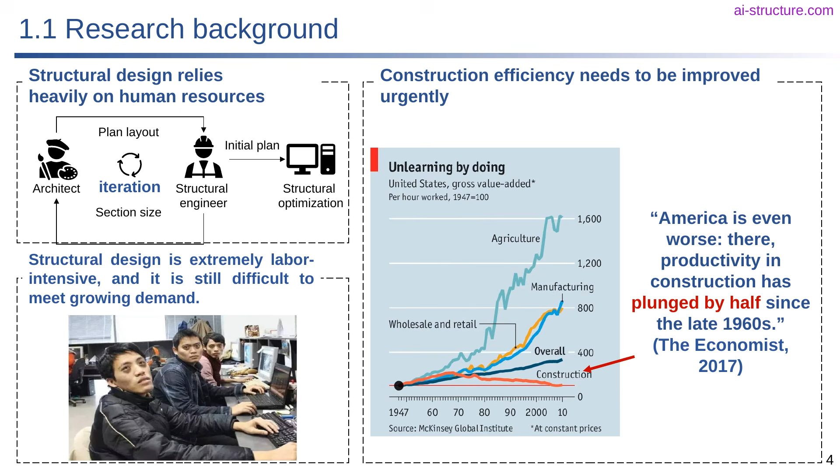When I saw this type of demonstration in 2017, I thought it would lead to a revolution in our industry. The reason is simple. For engineers, one of the most important outputs of our work is the design drawing. From the perspective of a computer, there is no fundamental difference between a human face represented as an image and an engineering drawing represented as an image. If AI can learn from many faces and generate a new face that looks realistic, then, after learning from many engineering drawings, it should also be able to generate a new design drawing that resembles one produced by an experienced engineer. That was the fundamental idea that led us to begin this line of research.

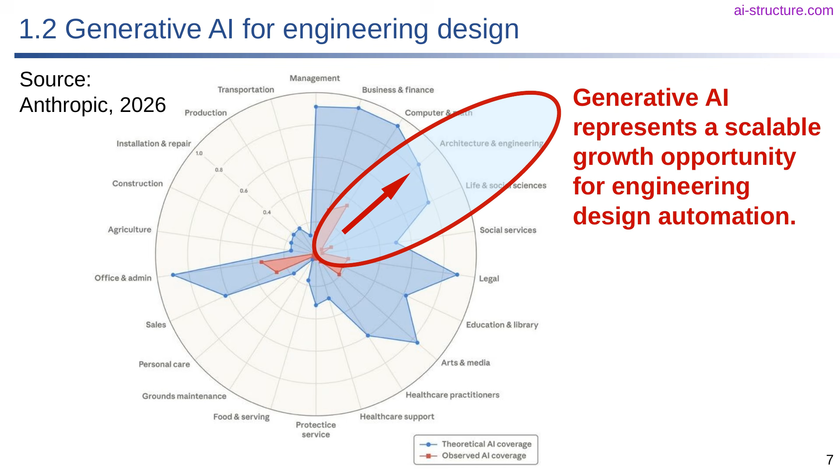9 years later, it is encouraging to see a similar conclusion in a report released by Anthropic, one of the best-known AI companies in the world. The figure on this slide compares the current use of AI in different activities with its potential future use. The red curve represents current application, and the blue curve represents future potential. Architectural and engineering design show a particularly large opportunity for further AI-enabled automation. Our conclusion, reached from the perspective of civil engineering, is therefore consistent with the broader assessment of the AI industry.

Looking back at our work, I think it can be summarized along 2 complementary directions. The first is to push the ceiling of AI algorithms. In Chinese we call this ding tian, reaching upward. As university researchers, we are especially interested in the scientific questions: how to improve representation, learning, optimization, physical consistency, and reasoning. The second is to ground the technology in diverse engineering applications. In Chinese we call this li di, standing firmly on the ground. We do not want the algorithm to work for only one narrow problem. If a task involves the generation of engineering drawings or design objects, we want to test whether the method can be extended across disciplines.

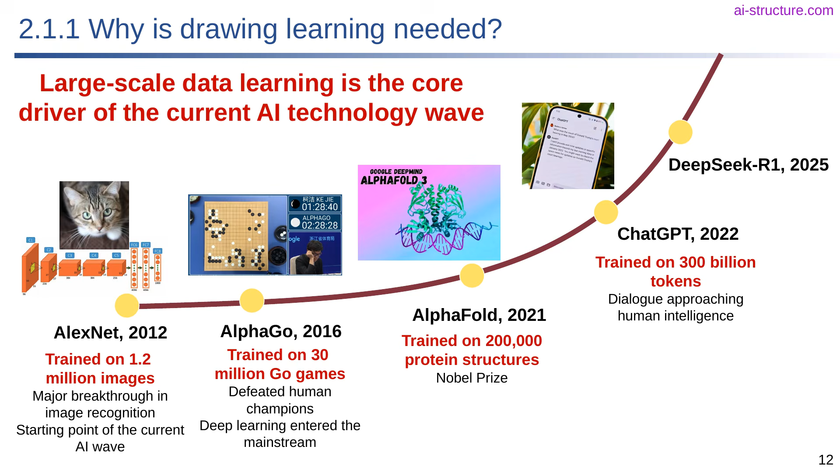If we want to use AI for engineering design, we must also make full use of this data learning capability. This is particularly important in engineering because a great deal of engineering knowledge is implicit rather than explicitly written down.

I like the well-known observation attributed to Dr. R. Dykes: engineering is the art of modeling materials we do not wholly understand, into shapes we cannot precisely analyze, so as to withstand forces we cannot properly assess, in such a way that the public has no reason to suspect the extent of our ignorance.

The quotation is humorous, but it makes an important point. A student may complete courses in structural mechanics, reinforced concrete structures, and design codes, but that student cannot immediately become a chief engineer. Several additional years in a design institute are normally required.

During that period, the young engineer learns from drawings, experienced colleagues, and project feedback, in ways that often cannot be reduced to simple rules. If human engineers must learn this way, AI must also learn from engineering drawings.

We therefore began by constructing a very large structural design dataset. More importantly, we established a data flywheel.

We made our model available online so that engineers could use it. When users encountered a special case that the model could not solve well, they reported the problem to us. We then expanded the dataset, retrained or improved the model, and returned a stronger model to the users. Through this cycle of use, feedback, accumulation, and optimization, the database and the model became progressively more capable.

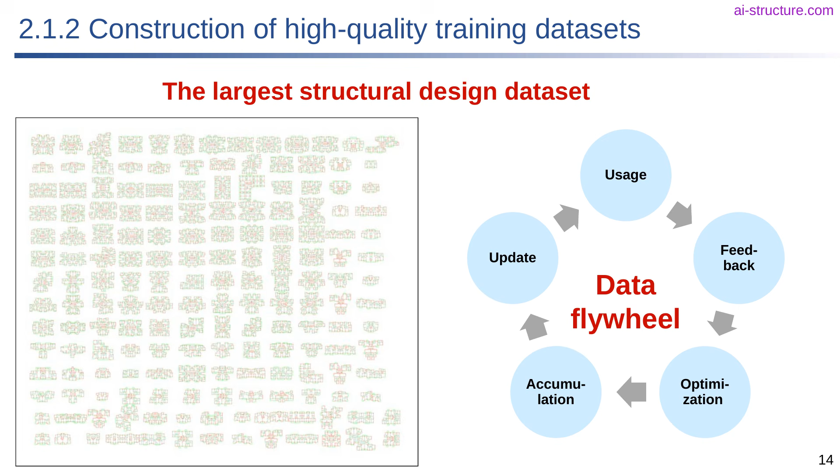Using these data, we divided structural design into several levels: vertical component layouts, horizontal component layouts, cross-sectional design, and special component design, including isolation and foundation-related tasks. This divide and conquer strategy allows us to define an appropriate representation and model for each task while gradually building a complete structural design chain.

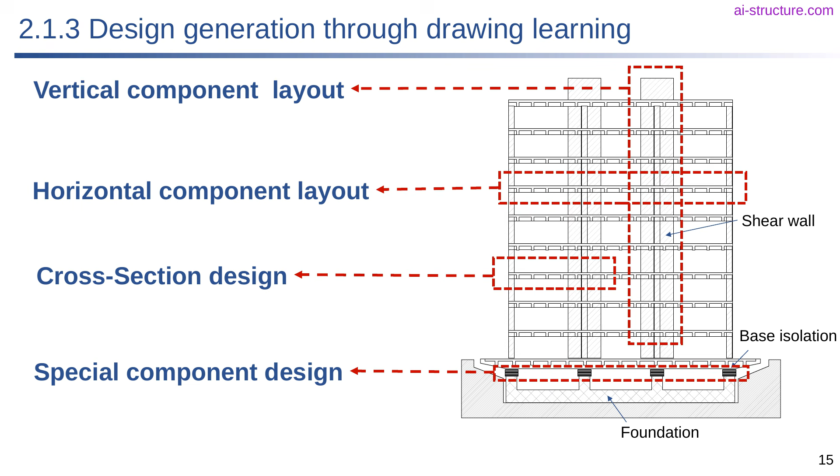There are two principal image-based generative methods available to us: generative adversarial networks, or GANs, and diffusion models. A GAN learns through competition between a generator and a discriminator. A diffusion model learns the inverse of a noise-adding process and produces a design through iterative denoising. Both can learn from existing drawings and generate a new design, but diffusion models have generally given us better global stability and local detail.

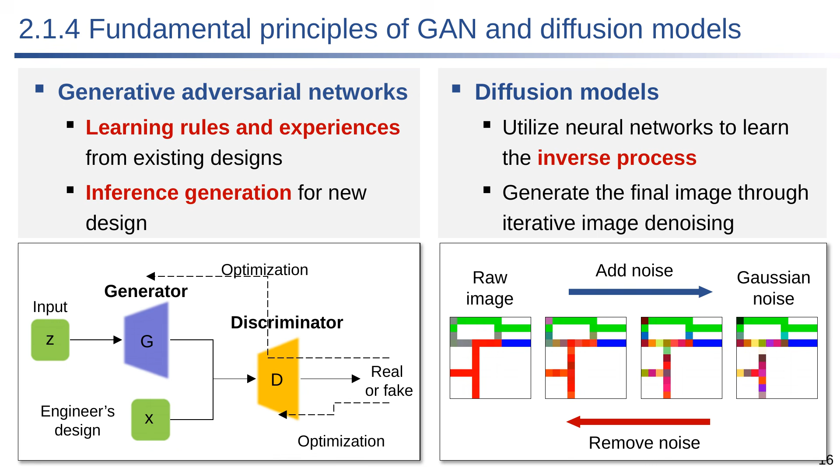The challenge is not simply to take a screenshot of the drawing. We must determine how each item of engineering information should be represented in a form that the model can learn.

Walls, windows, doors, columns, beams, and shear walls can be encoded as separate pixel channels. Binary values can indicate whether a particular component is present at a particular location. Masks can identify locations at which structural components are potentially feasible. Other design information can also be encoded as channels or feature maps.

At the story level, we may represent the plan, column dimensions, beam depth and width, slab thickness, loads, and response indicators. A local region of the drawing can therefore be connected to both component semantics and quantitative engineering attributes. The input is not merely a picture; it is a high-dimensional semantic representation combining geometry, component categories, and design conditions.

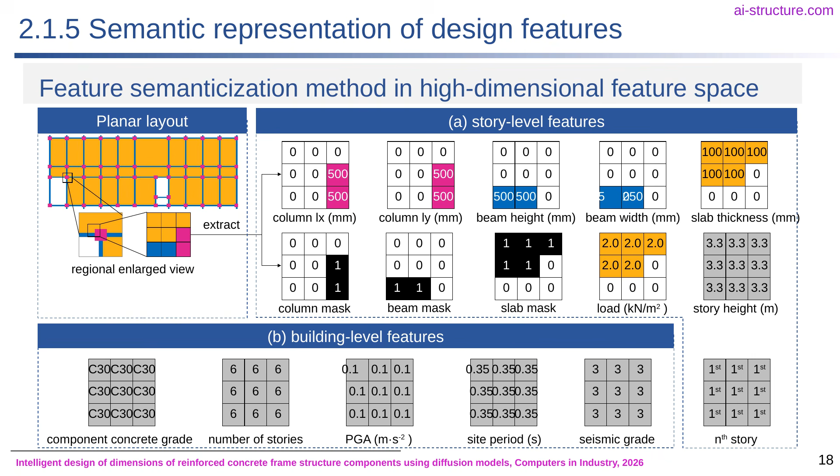We also fuse design conditions into the feature space. These conditions may include site characteristics, seismic intensity, peak ground acceleration, building height, number of stories, and structural response information. This enables the model to learn not only what a shear wall layout looks like, but also how the layout should change when the design conditions change. The output should correspond to the architectural plan and the governing engineering conditions.

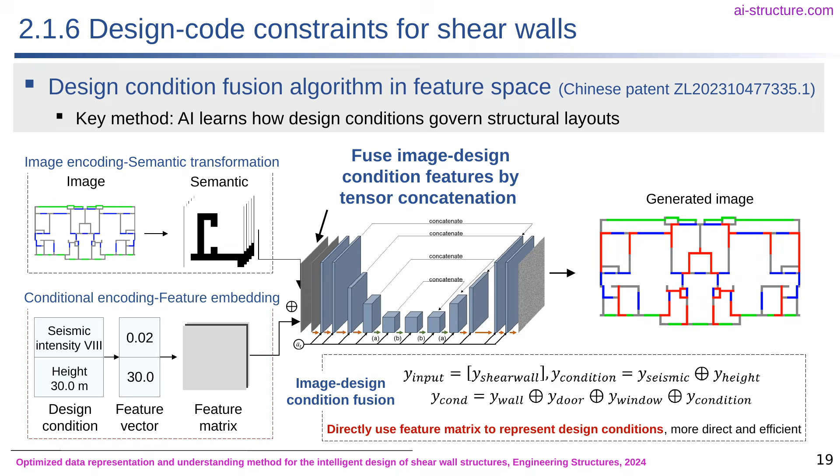Let me show a typical example. At the upper left is the architectural drawing. The gray lines represent walls, and the green lines represent doors and windows. At the lower left is the engineer's design, where the red elements are the shear walls. On the right are the designs produced by AI.

Our 2019 GAN result was already generally similar to the engineer's layout, but it contained local defects. When we later used a diffusion model, both the global arrangement and local details became much closer to the engineer's design.

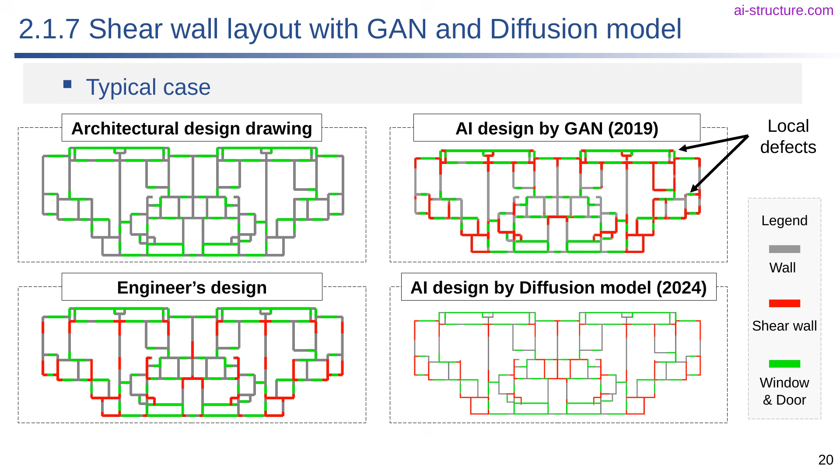Because the design conditions are included in the input, the model can generate different solutions for the same architectural plan. If the design PGA is 0.1g and the building height is 30 meters, it generates one shear wall layout. If the height is increased to 100 meters, it generates a different layout. If the seismic demand is further increased, the model changes the design again.

Two points are important. First, the model learns the relationship between design conditions and the quantity or area of structural components. Second, while adapting to the conditions, the generated details remain similar to the professional patterns in the training data.

The second principal representation is the graph. A graph consists of nodes and edges and is particularly effective for representing topological relationships. In engineering, nodes may represent columns, walls, rooms, or structural joints, while edges may represent beams, connections, adjacency, or other relationships. Graph neural networks are designed to learn from this non-Euclidean data.

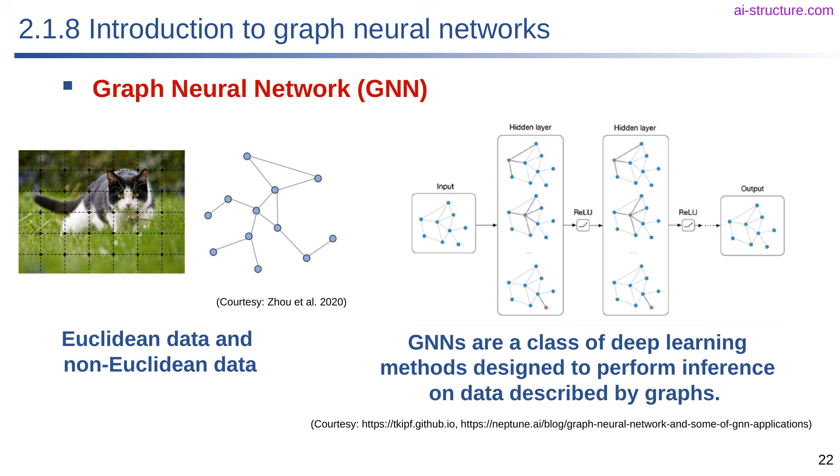We converted structural design into two representative graph learning tasks. The first is edge classification. Suppose the nodes represent columns and every pair of nearby columns is connected by a candidate edge. The model determines whether each candidate edge should be a beam. A required beam may be classified as red, while an unnecessary connection is classified as blue.

The second is edge feature prediction. Here, the model predicts a numerical attribute associated with an edge. For shear wall design, the attribute can indicate how much of the line between two nodes should be occupied by a wall. A full wall might be represented by 50% at both ends. A wall on only one side might be represented by 50% and 0. Two shorter wall segments with an opening in the middle might be represented by 30% and 30%. These formulations convert structural layout design into learnable graph problems.

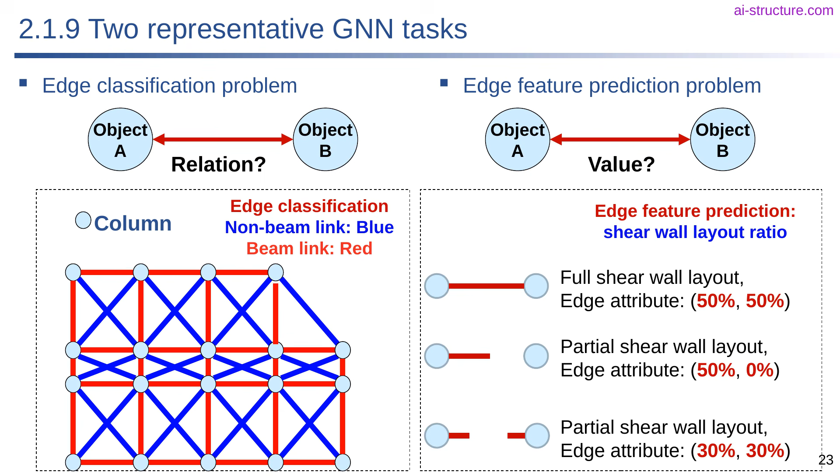When we first studied beam layout, we examined existing graph neural network methods and found that none could represent the beam layout rules with sufficient accuracy. We therefore proposed an edge feature enhanced graph neural network called GraphSF. The model combines node information, edge information, and the relationships in the floor graph so that candidate beam connections can be classified more reliably.

Given the column layout and floor outline, GraphSF can generate a beam layout very similar to that of an engineer. In tests on 15 real-world frame structures from well-known design institutes, the prediction accuracy exceeded 95%.

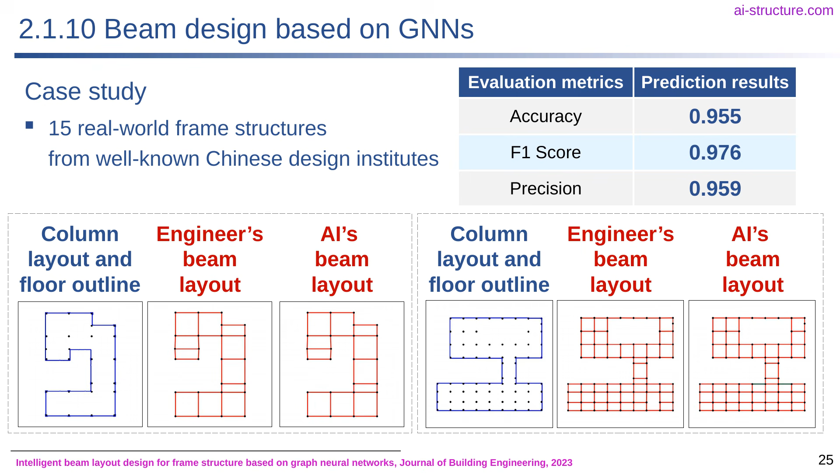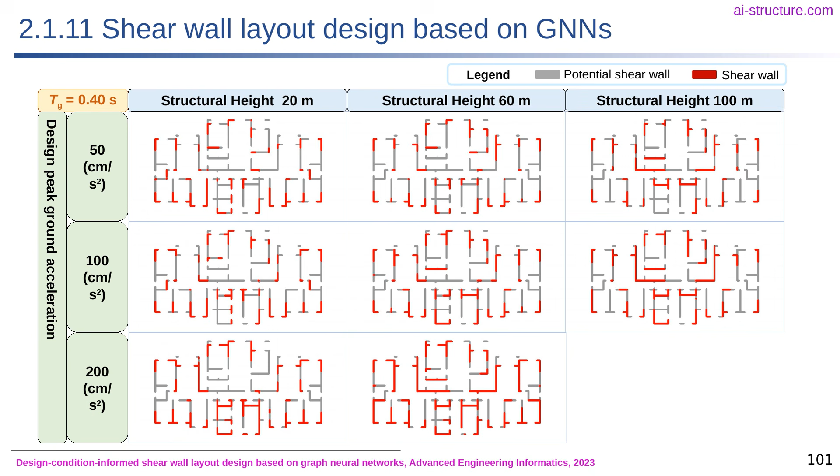We also used graph neural networks for shear wall layout. When the structural height or the seismic demand changes, the model adjusts the wall arrangement accordingly. The examples on this slide show that graph learning can capture both topology and the effect of design conditions, including the required quantity and distribution of shear walls.

At this stage, our students developed many algorithms for different design purposes: vertical components, horizontal components, cross-sections, foundations, and isolation systems, using GANs, graph neural networks, and diffusion models.

I sometimes joke with them that I do not need more papers, but the students need papers, so whenever there is an empty space in this research matrix, they can fill it with a paper.

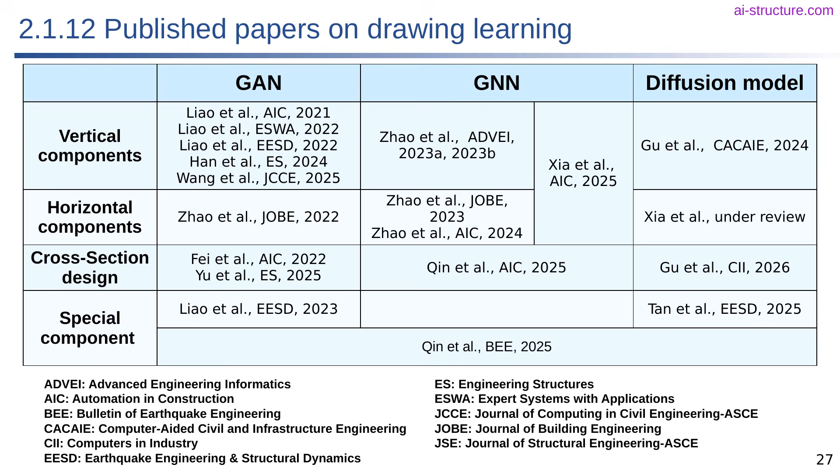Once the model can generate designs, it can produce thousands of cases at very low cost. This ability provides the foundation for intelligent optimization.

There are three reasons why intelligent optimization is necessary. First, there is a data quality problem: a model trained on poor designs will learn poor design practice. Second, a generative model is probabilistic and may sometimes produce a suboptimal solution. Third, a purely data-trained model eventually reaches the quality ceiling of its training set. We need a mechanism that can continually generate, evaluate, optimize, and feed improved solutions back into learning.

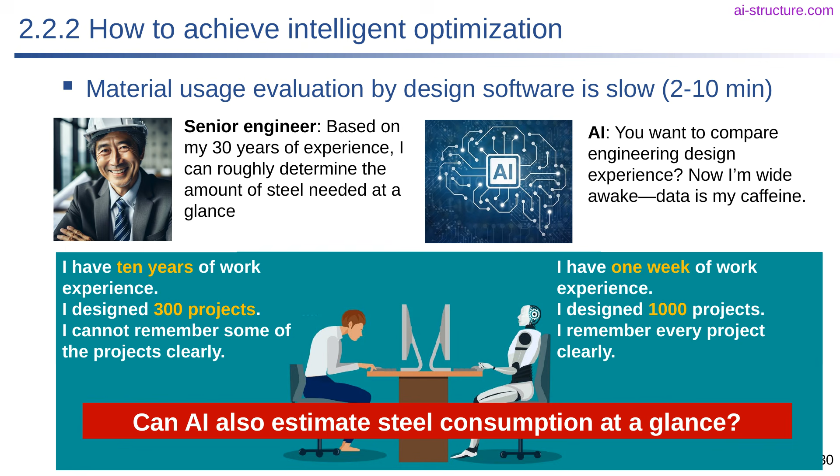Let us use material consumption evaluation as an example. Conventionally, the quantities of reinforcing steel and concrete are calculated using commercial structural analysis and design software. A single evaluation may take from 2 to 10 minutes. If an optimization process requires hundreds or thousands of evaluations, the total computational cost becomes unacceptable. A senior engineer, however, can often look at a design and estimate its material consumption very quickly, based on many years of experience. We asked whether AI could learn to perform a similar rapid evaluation.

We first used AI to generate approximately 4,300 structural designs. Producing so many designs manually would have been impossible, but AI generated them in roughly one week. We then used conventional software to calculate the material consumption of these designs and used the resulting dataset to train a surrogate model. The trained AI evaluator predicted material consumption with high accuracy and was at least 500 times faster than commercial design software. It therefore provided the fast, differentiable evaluation capability required for intelligent optimization.

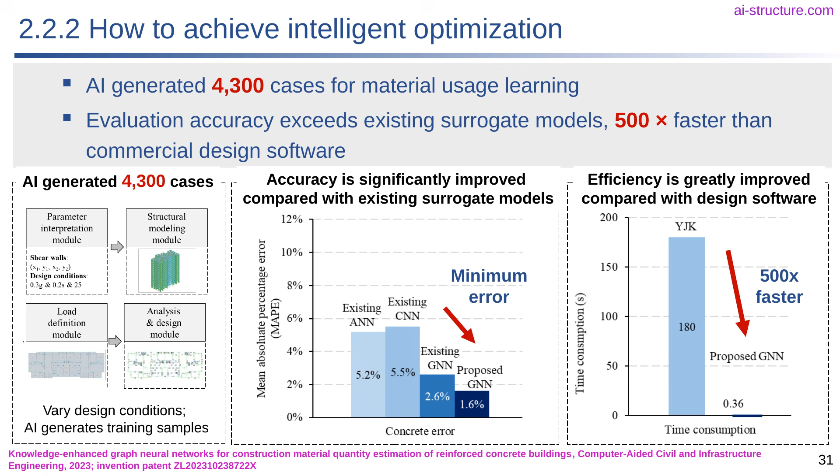With this capability, we addressed the three problems just described. First, we optimized the quality of the training data. In the example shown, the quality of the data improved by approximately 13%, and the quality of the subsequently generated designs improved by about 17.5%.

Second, we optimized individual AI-generated designs. By combining rapid structural response prediction with material consumption evaluation, the system could produce an optimized, code-compliant design in approximately 10 minutes. A comparable optimization based entirely on conventional finite element analysis could take hours.

Third, we established a self-improving loop. AI generated new designs, surrogate models evaluated them, optimization improved them, and the optimized solutions were returned to the training dataset. The effective data volume increased by approximately 7.5 times, and design quality improved by a further 12%.

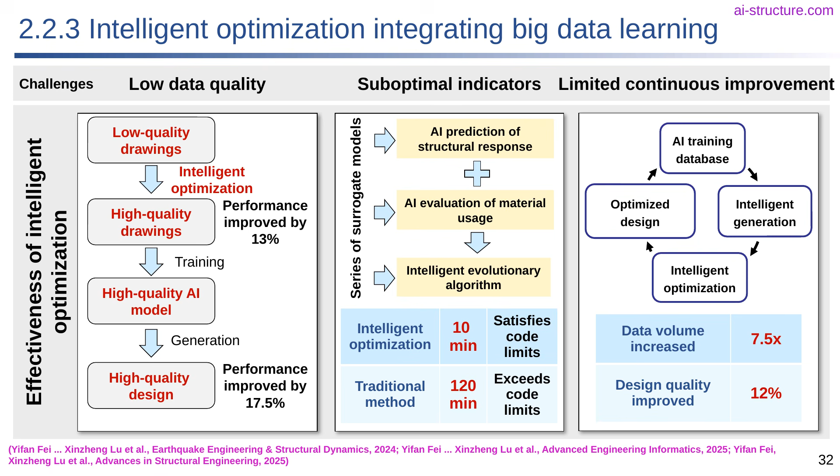The optimization stage did more than improve designs. It also provided the fast, differentiable surrogate models needed for our third stage: integrating engineering knowledge and mechanics directly into the generative process.

When we had worked on generative design for several years, we began to ask a more fundamental question: what is the essential difference between generating an engineering design and generating an article or an image? Most general-purpose generative AI systems are trained primarily for similarity. For engineering design, however, similarity is not sufficient.

The design must comply with engineering knowledge and design codes. For example, Chinese design code limits the allowable length or arrangement of a shear wall. A wall of 7.9 meters and a wall of 8.1 meters may look almost identical, but one may satisfy a code limit while the other does not.

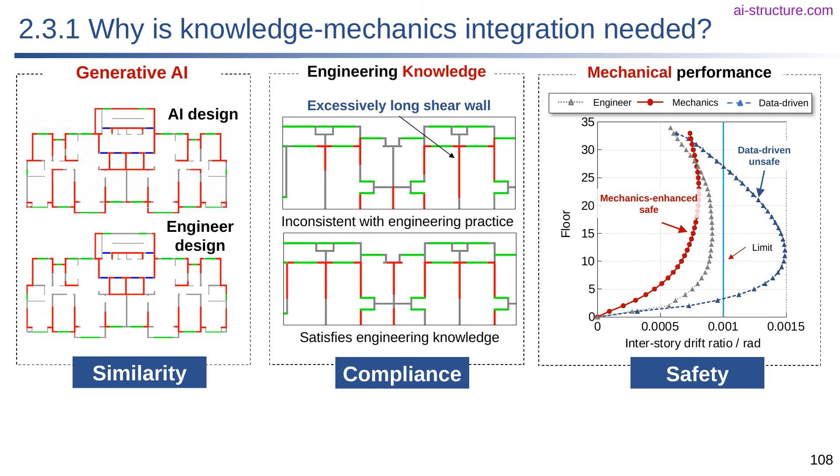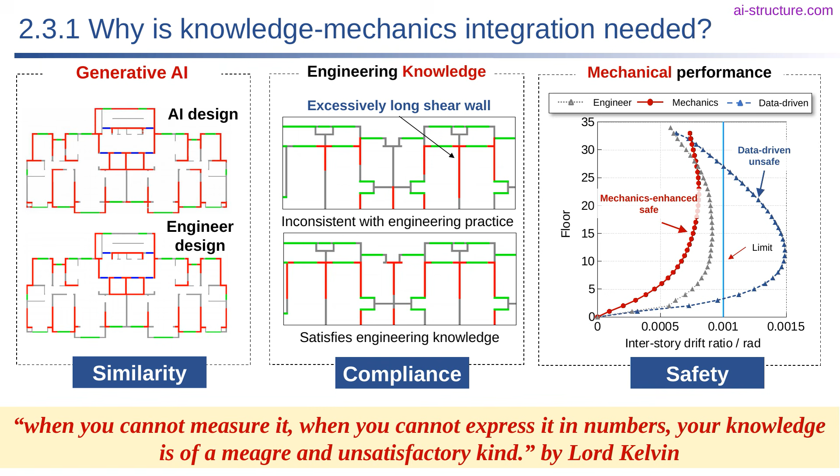Meanwhile, it must be mechanically safe. A layout may look realistic but produce excessive interstory drift, torsion, or member demand. As Lord Kelvin emphasized, knowledge becomes much more useful when it can be measured and expressed quantitatively. Our objective is therefore to convert professional knowledge and structural performance into quantitative constraints inside the generative model.

The basic formulation of a conventional generative model is simple. We have training data, we optimize the neural network parameters, and then we use the learned parameters to generate a result statistically similar to the training samples. This formulation encourages similarity, but it does not guarantee code compliance or mechanical safety. The loss function does not explicitly know whether an engineering requirement has been violated.

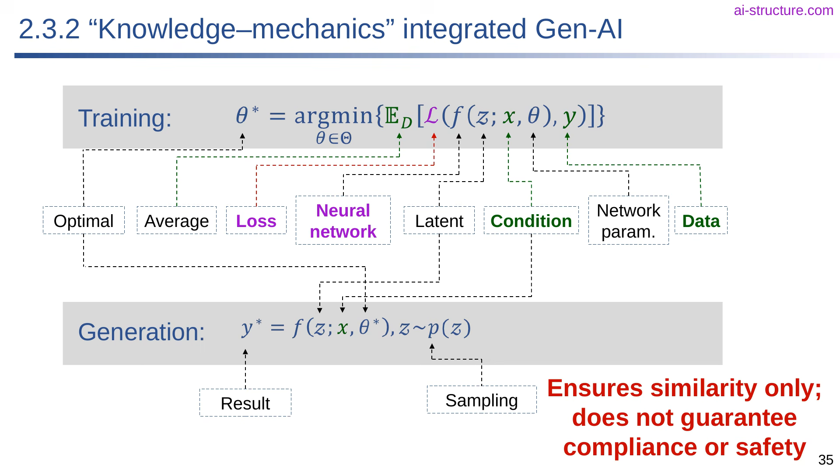We therefore modified both the training and generation formulations by introducing a constraint function, which I denote as C. The constraint function can contain design code requirements, engineering rules, and structural performance indicators. Knowledge and mechanics then participate in optimization rather than being checked only after generation.

For gradient-based integration, the constraint function should be differentiable. Conventional finite element or structural design software is often difficult to differentiate directly. The neural network surrogate models developed in the optimization stage are therefore essential. We implemented this idea through a method called MAGIC, or Mask and Gradient Integrated Constraint Generative AI.

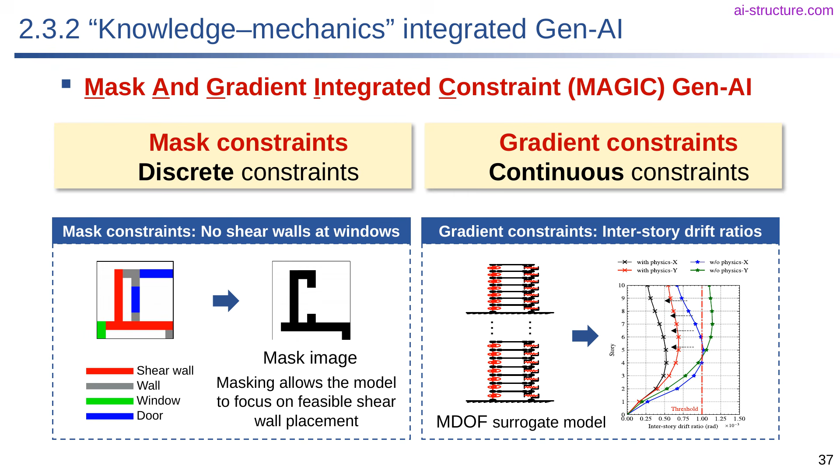Every time the length or thickness of a shear wall changes, a graph neural network surrogate can predict its flexural and shear stiffness and the derivative of those quantities with respect to the design variables. The gradient tells the generative process in which direction the wall should be modified to improve compliance. Depending on the problem, the differentiable constraint function can be provided by a surrogate model or a differentiable finite element formulation.

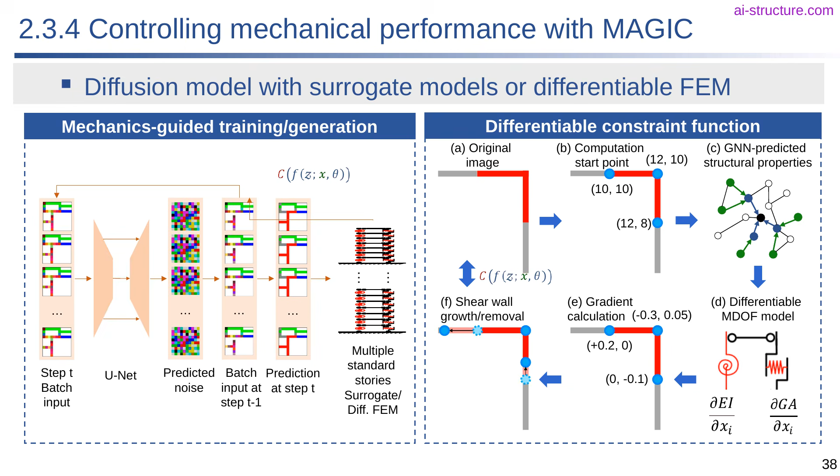In the case shown, the original method produced mechanically compliant designs in approximately 77.78% of the test cases. After mechanics-guided training and generation were introduced, the compliance ratio increased to approximately 100% for the indicator examined. The important point is that mechanics is no longer only a final check. It actively guides the generation process.

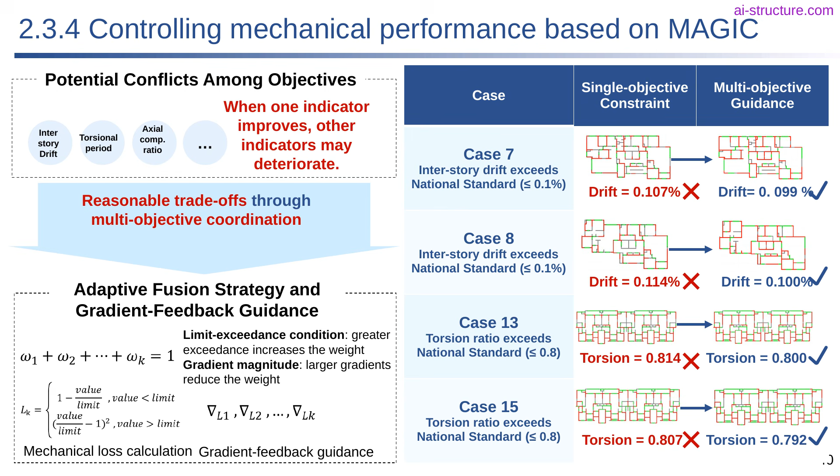The previous example involved one constraint. Real engineering design involves many potentially conflicting objectives: interstory drift, torsional response, axial compression ratio, flexural performance, shear performance, material use, and other requirements. Improving one indicator may make another worse. We therefore developed multi-objective coordination methods to determine reasonable trade-offs among several constraint gradients.

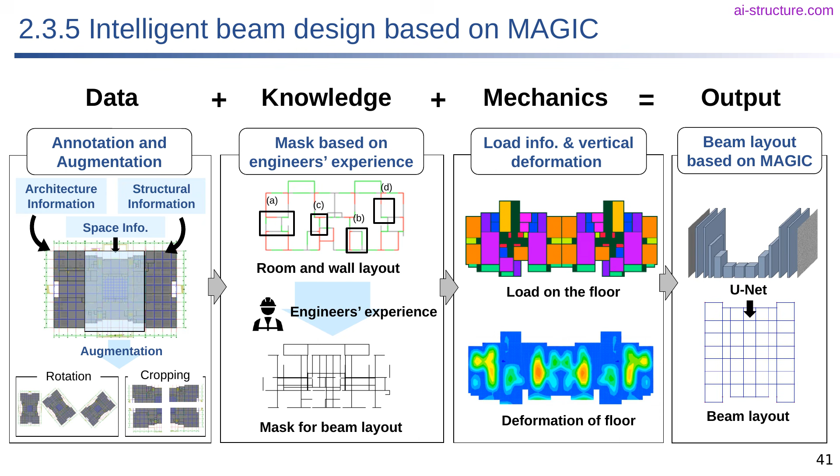The same concept can be applied to beam design. AI needs knowledge about where beams should and should not be placed. It also needs mechanical information about floor loads, vertical deformation, and the stiffness provided by the beam system. We combine data augmentation, annotations derived from engineers' experience, mask-based spatial constraints, load information, deformation prediction, and mechanics-guided evaluation. The output is a beam layout informed by data, knowledge, and mechanics together.

For complex shear wall buildings, the resulting beam layouts were very similar to engineers' designs, with intersection over union values above 0.90. In an irregular frame example, the connection between the left and right portions of the structure was difficult. The engineer used a secondary beam, while the AI proposed a main beam connection that provided a more direct and mechanically favorable solution. This is an important change. The model is no longer merely imitating a historical drawing, it can produce an alternative with better structural performance.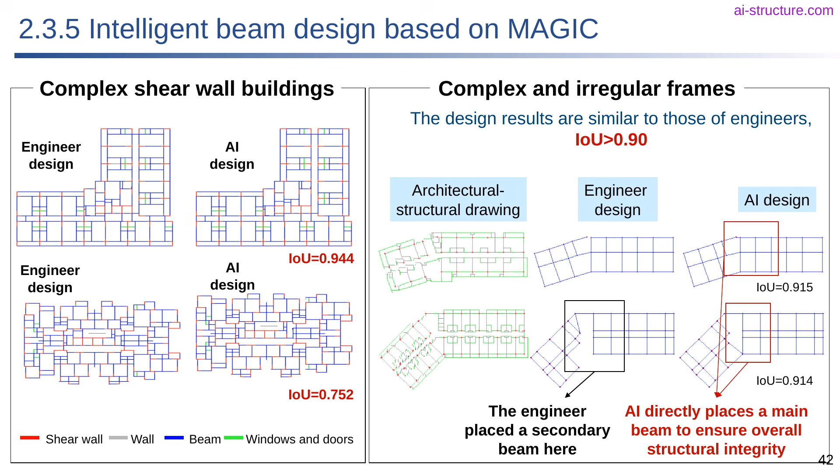The fourth stage of our research is reasoning, particularly spatial reasoning. We now turn from computation to reasoning. The key question is how an AI system can move beyond a closed set of explicitly programmed constraints and use broader spatial and professional knowledge.

When we compared current AI design with human design, we identified two remaining differences. First, current AI design mainly relies on data and computation. Human designers also reason. We compare alternatives and ask why one design is better than another.

Second, most engineering AI systems have a relatively closed knowledge boundary. Human design can draw on much broader knowledge and common sense. In Hong Kong, for example, feng shui may influence an architectural decision significantly. More generally, users may express cultural, functional, or personal requirements that are not contained in a conventional dataset. Large language models provide one possible route for introducing this broader knowledge and reasoning capability.

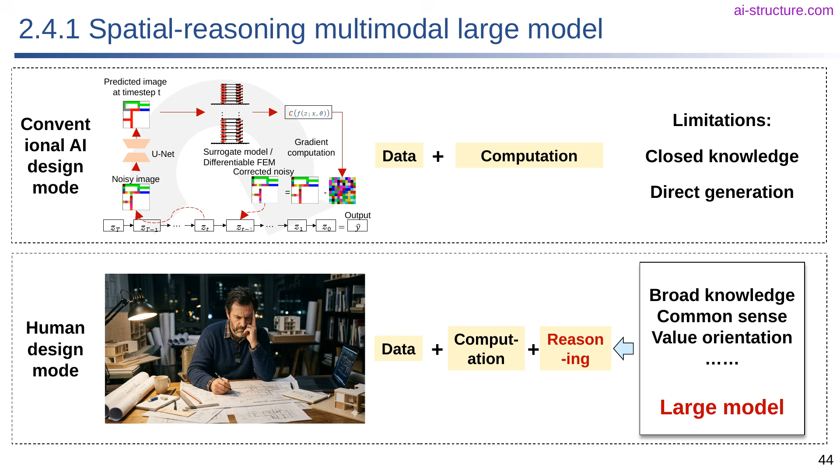The computational core of a language model is the token. We input a sequence of tokens, and the model predicts the next token. Plain text can represent words and sentences very well, but how can it accurately represent an engineering drawing? We have a saying, a picture is worth 1,000 words. In fact, even 1,000 ordinary words may be insufficient to describe the geometry and relationships in a floor plan precisely. We therefore need new tokens that represent spatial information. We call them spatial tokens.

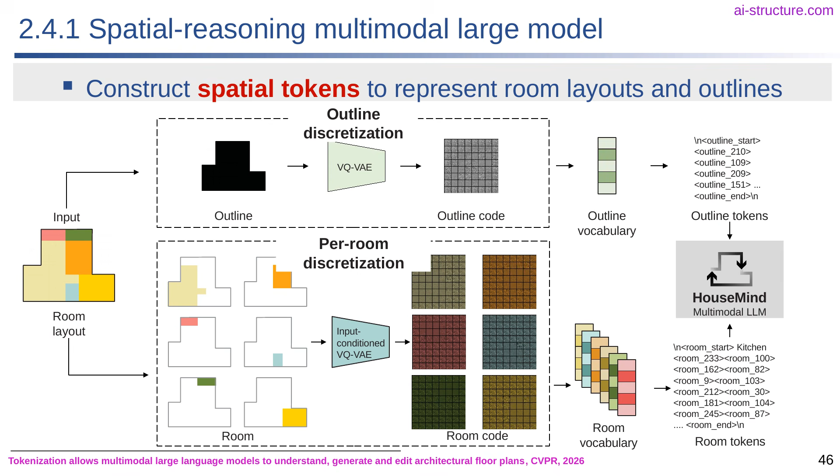In addition to the conventional language vocabulary, we define tokens for items such as the outline of a building, the geometry of rooms, room categories, and their spatial distribution. For example, a building outline can be discretized and represented as a sequence beginning with an outline start token, followed by learned geometry tokens, and ending with an outline end token. This provides a bridge between the geometric world of drawings and the token world of large models.

Based on this idea, we developed a multimodal model called HouseMind for architectural floor plan tasks. Because spatial tokens are not part of the original language model vocabulary, we first initialize and embed the new token representations. We then carry out full pre-training to align visual, geometric, and language modalities, followed by supervised fine-tuning for instruction-based tasks. After this three-stage process, the model can understand a design drawing, generate a floor plan from a request, and edit an existing plan according to instructions.

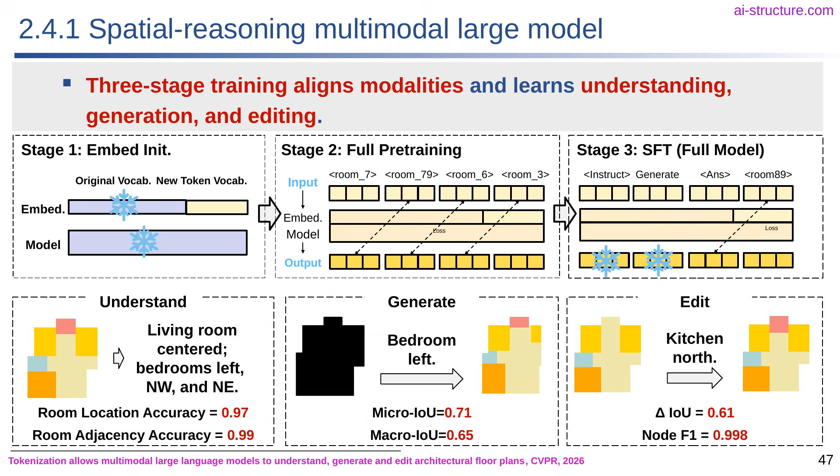Another student subsequently developed a coordinate token representation for feature-sparse components. Floor plans can be abstracted into component-level line primitives and room-level polygon primitives. A vectorized sequence of coordinate tokens preserves the exact positions of sparse geometric components more compactly than a dense image representation.

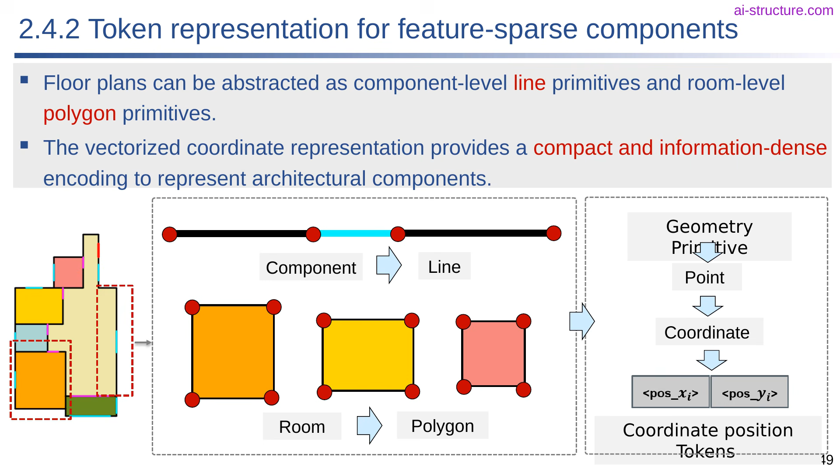That concludes the part of the presentation concerned mainly with algorithmic research. I will now turn to real-world engineering applications. We did not want this research to remain only in academic papers, we wanted engineers to use it in actual projects.

We therefore developed a platform called AI Structure Copilot, available through ai-structure.com. The system is installed as a plugin for CAD, so an engineer who is familiar with CAD can use it without learning an entirely new working environment. The user completes the initial setup locally and uploads the required design information. The cloud-based AI modules perform the design and return the results.

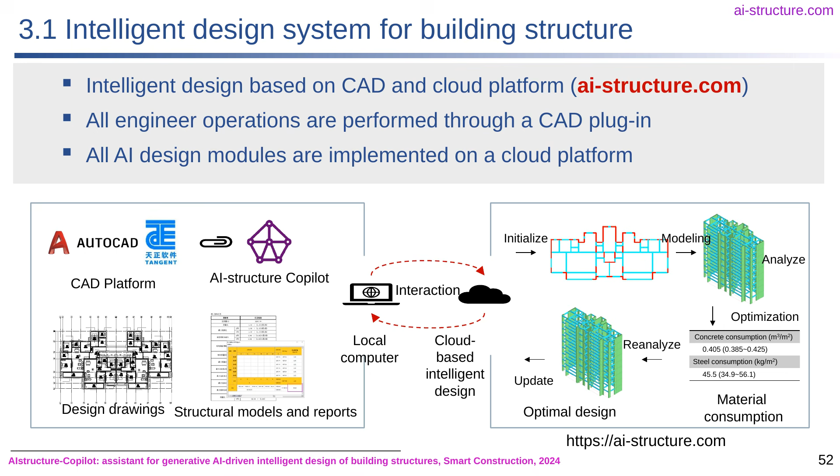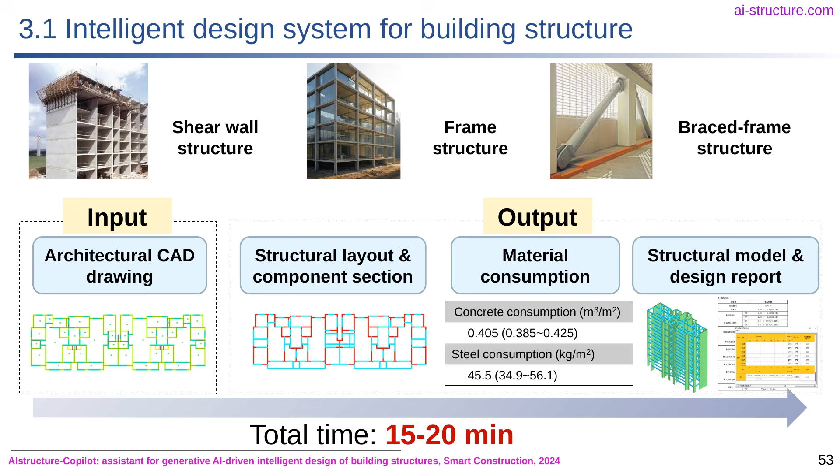The workflow includes initialization, layout design, member sizing, structural modeling, analysis, optimization, and material consumption evaluation. Given an architectural CAD drawing and design conditions, the outputs include structural component layouts, member sections, estimates of concrete and steel consumption, a structural analysis model, and a design report. The overall process typically takes approximately 15 to 20 minutes.

To improve pre-processing efficiency, we use AI computer vision. The system identifies architectural walls, axes, windows, doors, and other components, vectorizes them, and converts the drawing into structured JSON information for the design model. This is important because architectural CAD drawings are often complex and are not immediately suitable as direct input to a generative model.

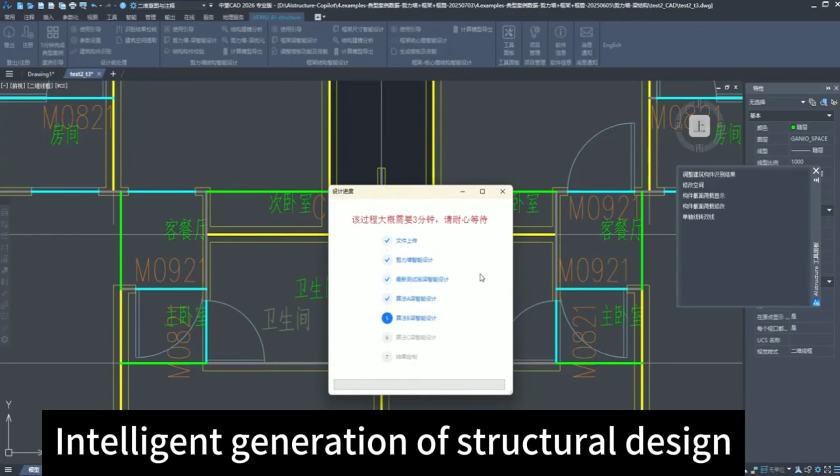Let me show a short demonstration. First, the user enters the design conditions and selects the architectural drawing. AI automatically identifies and preprocesses the architectural components. The user then starts structural design, and the system generates the component layout. With another command, it creates the structural model and performs the structural calculations.

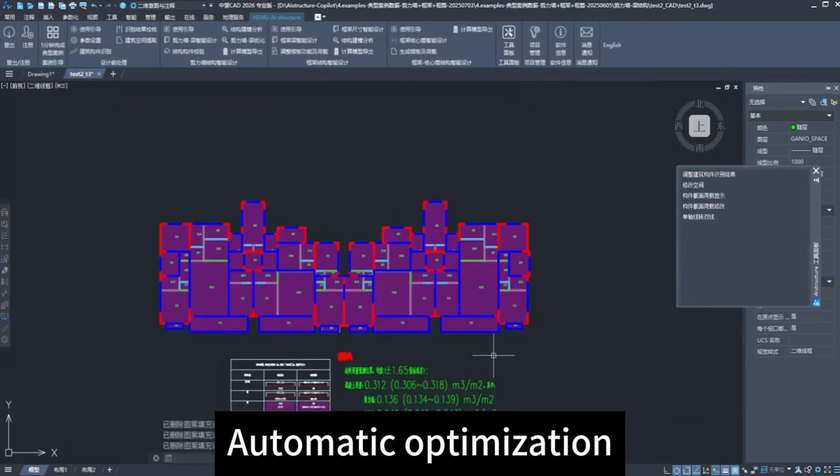The report is returned to the user. The system can then optimize the structure and report material consumption and other indicators. Only a small number of user operations are required. An architect or a less experienced engineer can follow the process, while the AI and professional software perform the specialized calculations.

The example shown has project ID 5034. It is a 57-meter-high shear wall building designed for a seismic design intensity of 0.1 G. The AI-generated design passed evaluation by professional design software. The timestamp is around 4:27 in the afternoon.

We have observed two peak periods of platform use, one shortly before 5 p.m. and another later in the evening. Without the software, an engineer might need to work overtime. With the software, the task can be completed much more quickly, and the engineer may be able to go home on time.

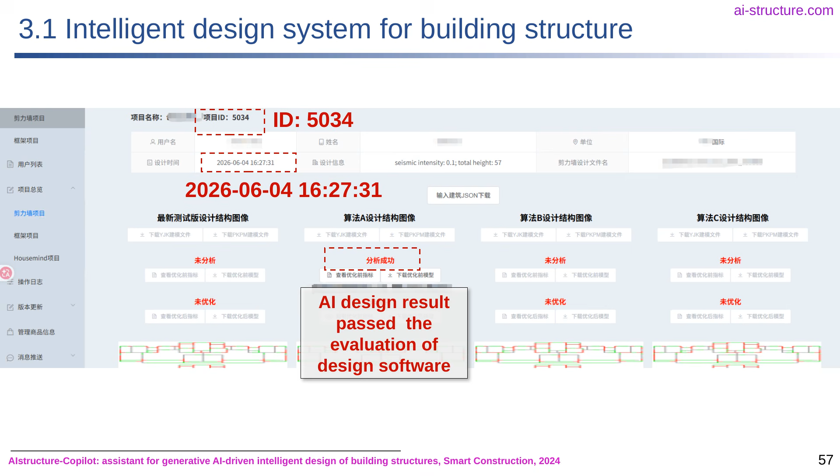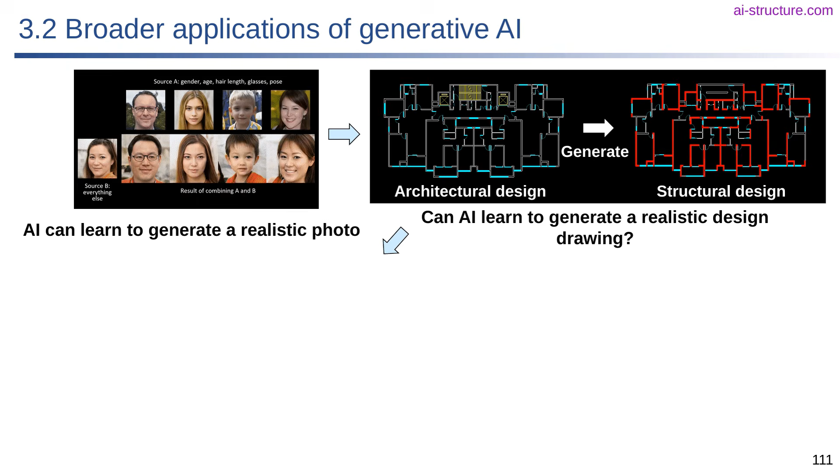The original question that motivated our work was, if AI can generate a realistic human face, why can it not generate a structural design that resembles one produced by an experienced engineer? Once building structure design became possible, the next question was, why should the method remain limited to that one discipline?

Many engineering tasks involve generating drawings or spatial layouts. We therefore extended the approach to room layouts, strengthening existing buildings, infrastructure such as dams and bridges, photovoltaic support structures, and MEP systems such as fire sprinklers. The application objects are different, but the basic pattern remains similar: represent the design object, learn from data, generate alternatives, evaluate them with professional knowledge and mechanics, and optimize the result.

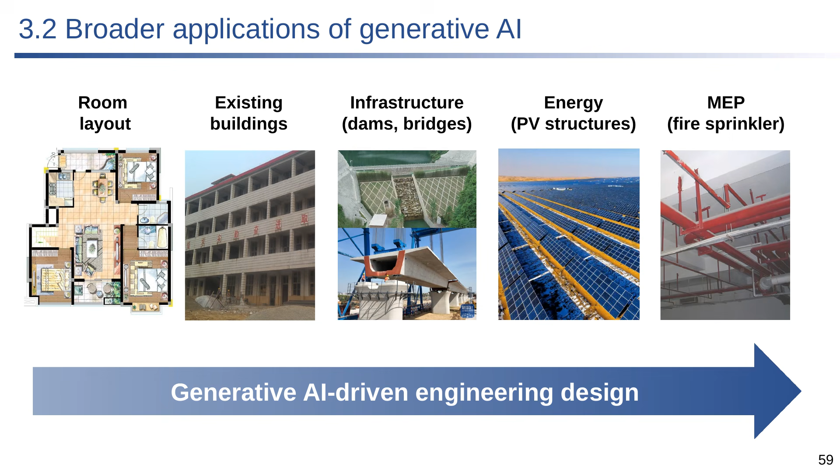A design institute contains different disciplines. Architects and structural engineers may have conflicting requirements, and repeated coordination can reduce efficiency. An architect may say, "Do not place a column here," while the structural engineer says, "A column is needed here."

Existing intelligent design systems also have limitations. They often focus on simple house types and may not generate key architectural components such as doors and windows. We therefore began to integrate architectural floor plan generation with structural design.

Local design customs are important. The arrangement preferred in Japan may differ from that preferred in Hong Kong or the Chinese mainland. In many locations, however, only a small local dataset is available. We addressed this problem through transfer learning.

A general model is first pre-trained on a large common dataset containing more than 80,000 plans. A much smaller local dataset, Chinese housing plans, for example, is then used for fine-tuning. In the experiment shown, transfer learning improved micro-IOU and macro-IOU by approximately 300.9% and 532.3%, respectively, compared with direct training on the small dataset.

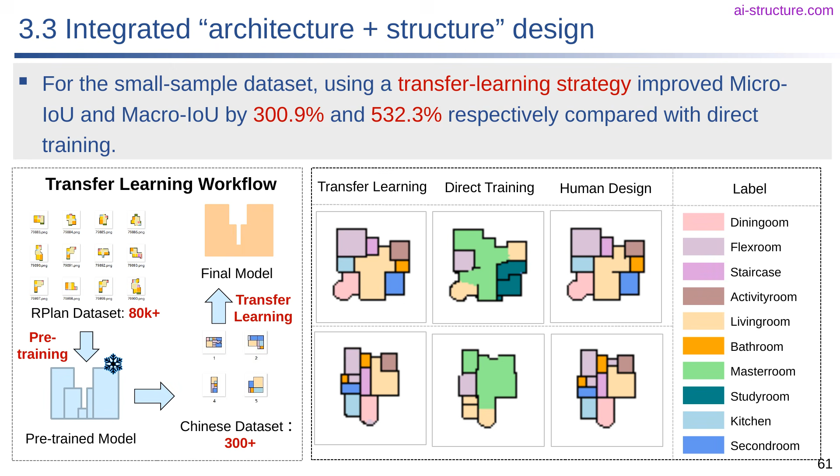After generating the room layout, we use coordinate position tokens to design doors and windows. The multimodal model receives the building outline, floor plan design, and an instruction, and then generates a sequence representing the door and window locations. In the reported cases, the door IOU was approximately 0.8324, the window IOU was approximately 0.8707, and the location F1 score reached approximately 0.95.

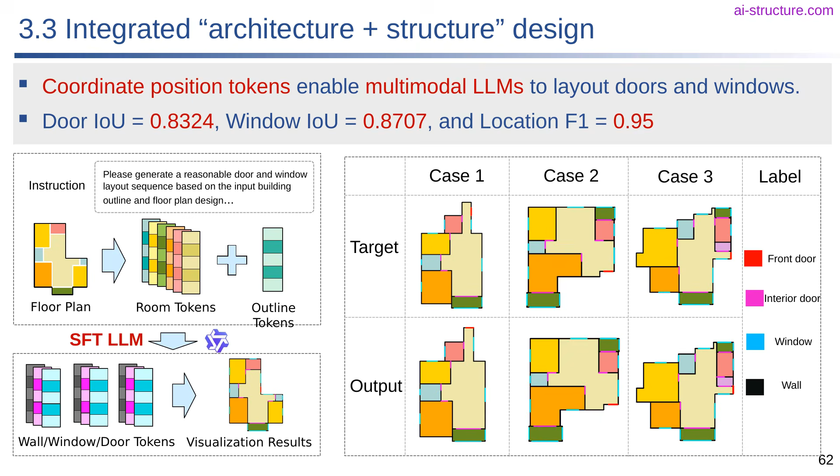The architectural layout then becomes the input to the structural system. A diffusion model and a heterogeneous graph neural network are used for column layout, beam generation, and member sizing. The complete chain includes the floor plan, doors and windows, columns, beams, member sections, automated structural modeling, performance evaluation, and compliance checking.

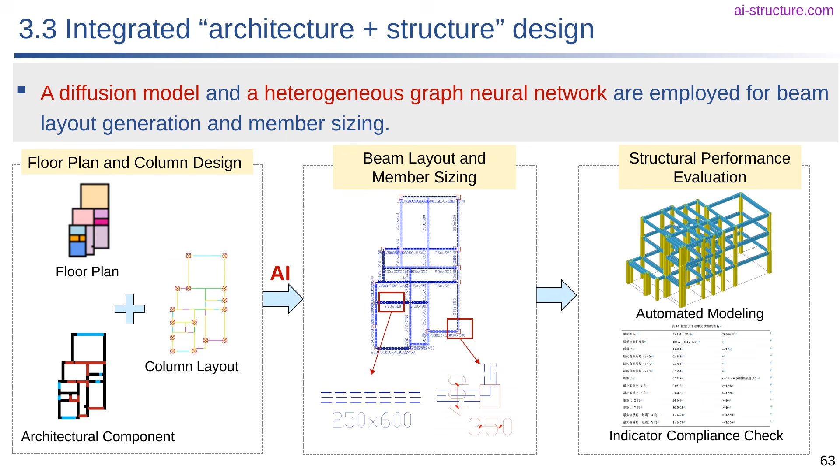For the two-story independent residential building shown, the process begins with the floor envelope and functional topology, then generates room layouts, doors and windows, columns and beams, and the analytical model. Engineers can review and fine-tune the AI result. In this case, the architectural design time was reduced by approximately 85.2%, and the structural design time was reduced by approximately 96.1%.

The software interface allows the user to specify the building outline, number of stories, family members, budget, bedrooms, bathrooms, and the required rooms and their relationships. For example, the user may require the bathroom to be close to the bedroom or a reading room to be adjacent to another functional space. The system displays the generated design and allows the user to edit it.

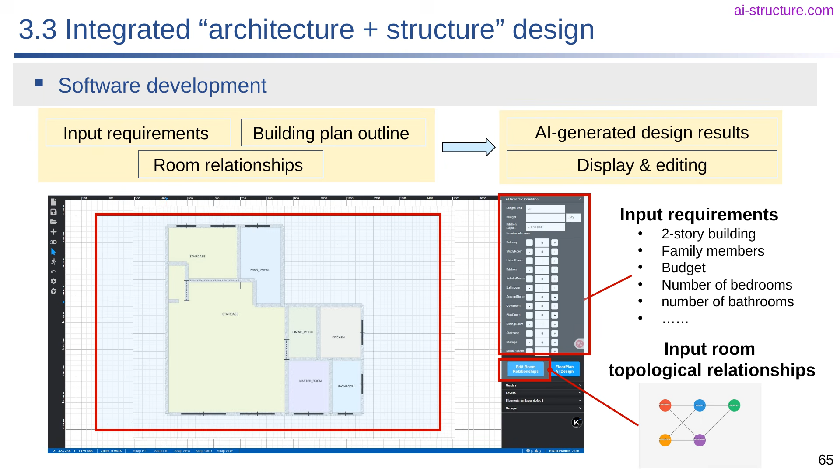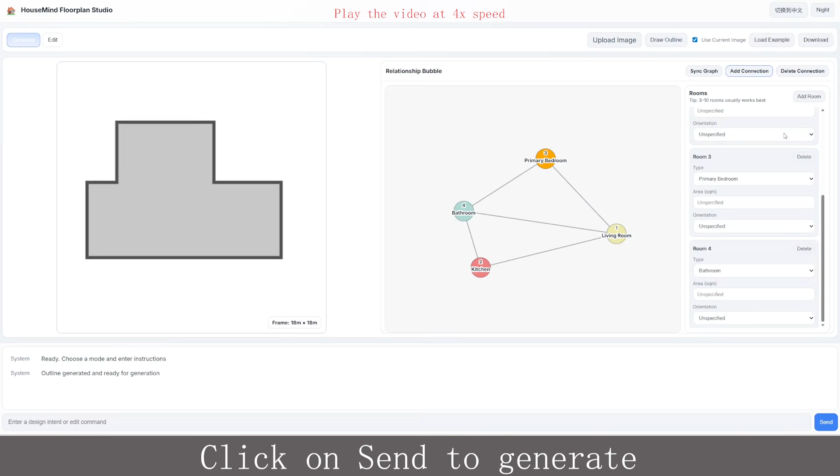Let me show the floor plan generation and editing platform. The user draws or uploads the building outline and specifies the rooms and their topological relationships. The model generates a room layout together with doors and windows.

If the user wants to add a storage room, the new requirement can be inserted through an instruction. If the user wants a local change, that request can be expressed in natural language. The system modifies the designated region and updates the room topology while retaining the rest of the design as far as possible.

A multimodal large model can also generate facade renderings from the design sketch. The architectural sketch and background image are combined with a textual prompt, and the model generates a rendering corresponding to the requested style and context. Through this chain of tools, even a non-specialist user can participate directly in the early design of a house.

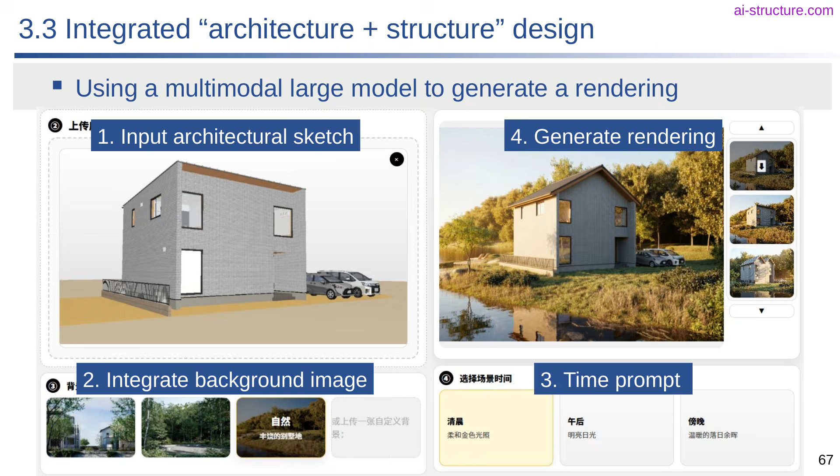This may change the business model of the design industry. In the conventional process, the client contacts an architect, the architect develops the scheme, and the structural engineer then develops and checks the structure. Single-discipline AI can make the structural stage faster and reduce cost. Integrated architectural and structural AI may go further by enabling the Design Institute to serve a much larger number of clients, including individual clients, while retaining professional review and approval.

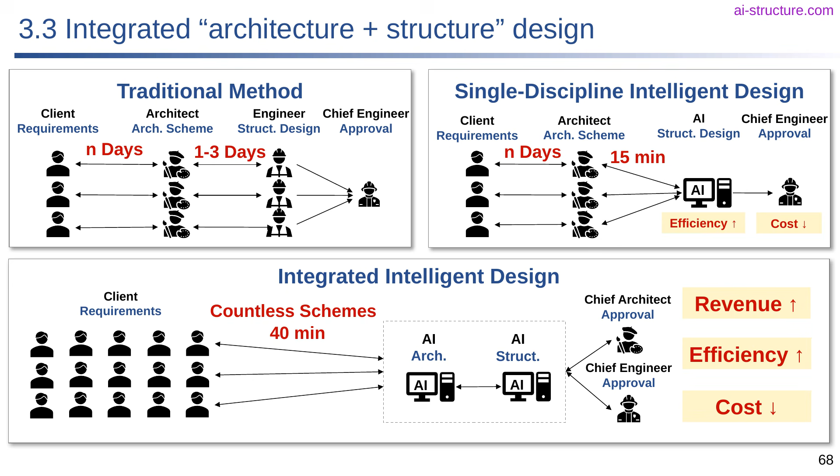We also applied generative design to the strengthening of aging frame structures using buckling-restrained braces, or BRBs. The placement of BRBs must satisfy two very different types of requirements. Architectural constraints, stairs, corridors, bathrooms, doors, and functional spaces, determine where a brace is feasible. Structural constraints determine where braces are needed for seismic performance. Architectural constraints are difficult to express completely as equations, while structural constraints must be quantitatively evaluated.

We therefore divide the process into two stages. In the first stage, generative AI learns from existing architectural layouts and identifies feasible brace positions according to the architectural constraints. In the second stage, physics and rule co-guided optimization selects the final BRB layout according to structural performance requirements. This separates a difficult qualitative feasibility problem from the quantitative structural optimization problem.

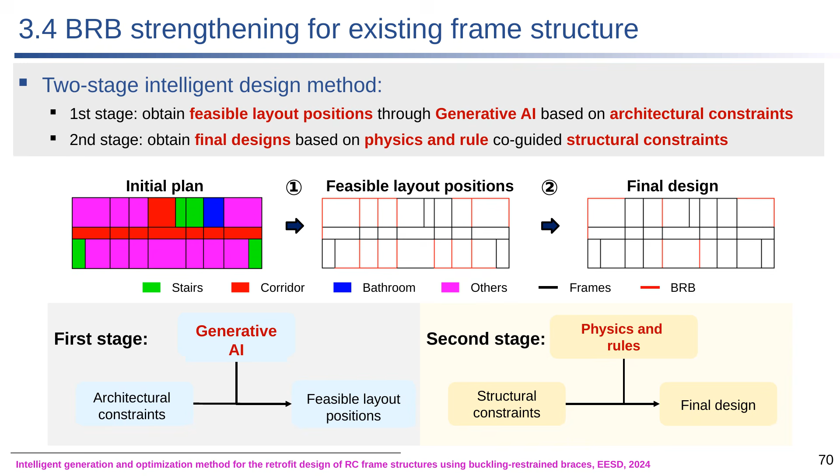For the typical three-story case shown, the system first generated feasible brace positions and then selected the final design. The complete design took approximately 15 minutes and satisfied the code requirements while respecting the architectural constraints.

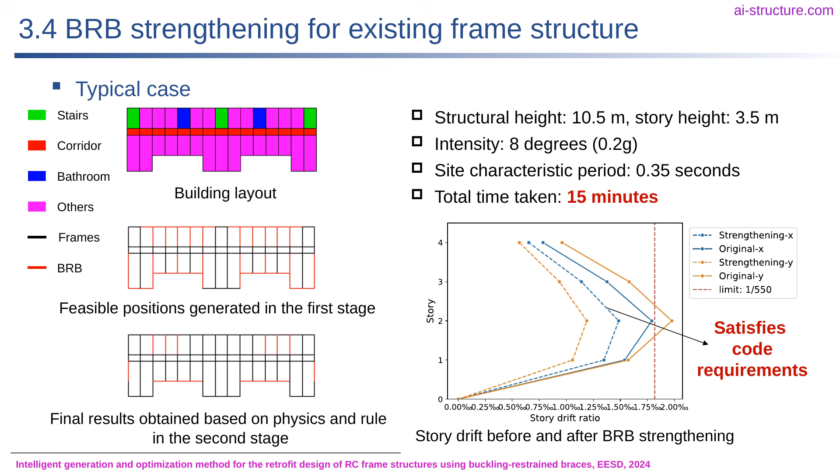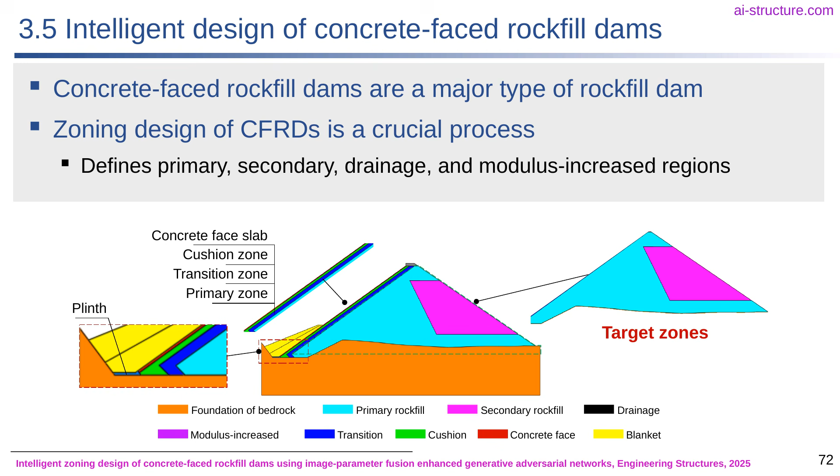We then extended the method from buildings to infrastructure, including concrete-faced rock-fill dams. A concrete-faced rock-fill dam contains several functional zones, including the cushion, transition, primary rock-fill, secondary rock-fill, drainage, and modulus increased zones. Zoning design is a crucial and demanding part of the dam cross-sectional design.

For this problem, we moved from an image-based representation to a compact parameter-based representation. Key geometric parameters describe the dam and zoning boundaries. When the geometry and material variables are combined, the design is represented in a stable and interpretable 32-dimensional latent space for diffusion generation. This reduces the dimensionality while preserving physically meaningful variables.

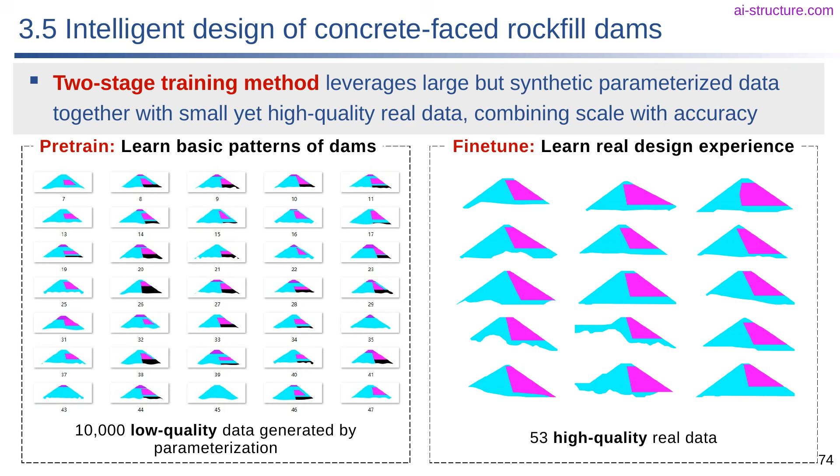The main difficulty is data scarcity. We collected only 53 high-quality real designs, which is not enough for direct training of a complex generative model. We therefore used a two-stage strategy. First, parameterized generation produced approximately 10,000 synthetic cases. These lower-quality cases allowed the model to learn the basic geometry and patterns of dam zoning. Second, the 53 high-quality real cases were used for fine-tuning so that the model could learn actual engineering experience.

A dam design must satisfy anti-sliding stability, deformation, and other mechanical requirements while controlling cost. We developed surrogate models with a common residual net 1D architecture. The input combines geometric and material channels, and the outputs include the minimum factor of safety and deformation-related quantities. These models provide rapid mechanical evaluations for generative design and optimization.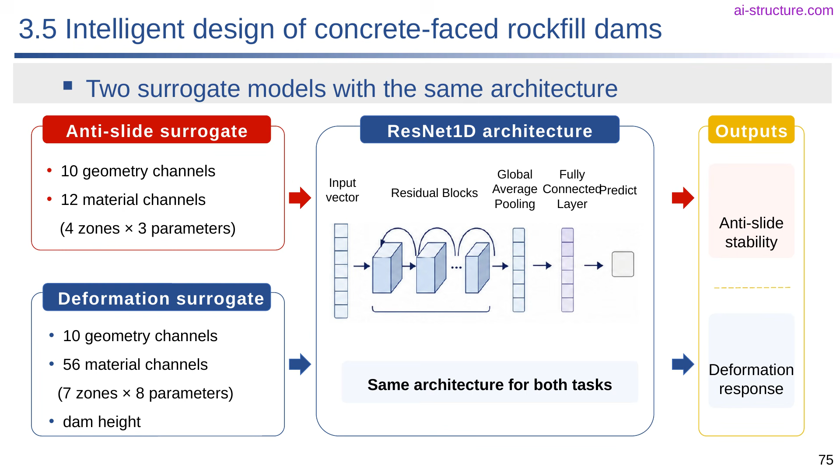The stability, deformation, parameter realism, and economy objectives may conflict. We therefore perform multi-objective fusion in a 10-dimensional key-parameter space. When a design fails to meet a code limit, the corresponding compliance metric and gradient guide the correction. When all limits are satisfied, the objective weights can shift toward economy and other design goals. This allows parameter-level resolution of mechanical conflicts.

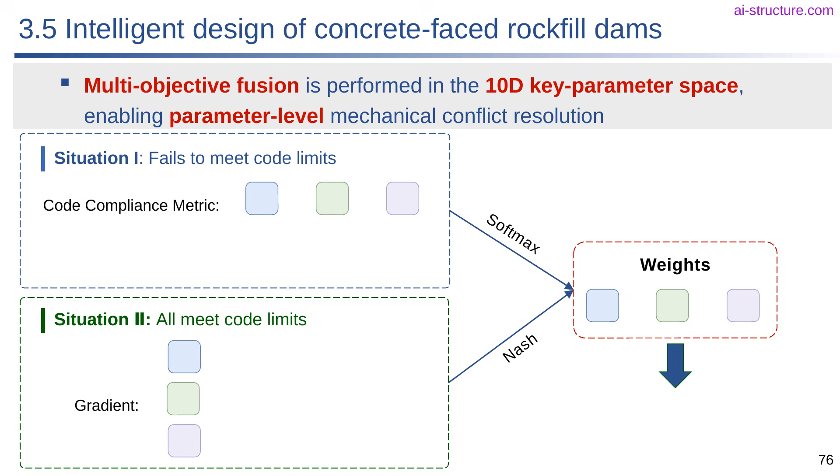The input geometry is converted into an AI zoning design. The system then reports similarity to engineering designs and evaluates the stability safety factor. The two-dimensional zoning result can also be combined with terrain information to generate a three-dimensional dam model. A design report can subsequently be generated automatically.

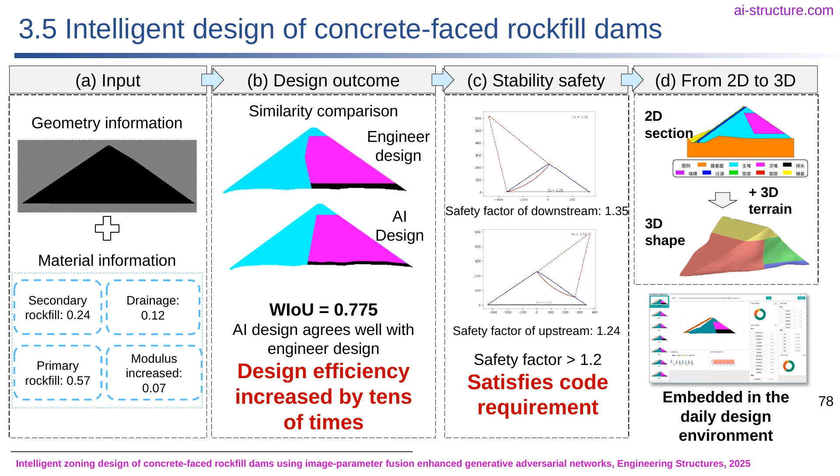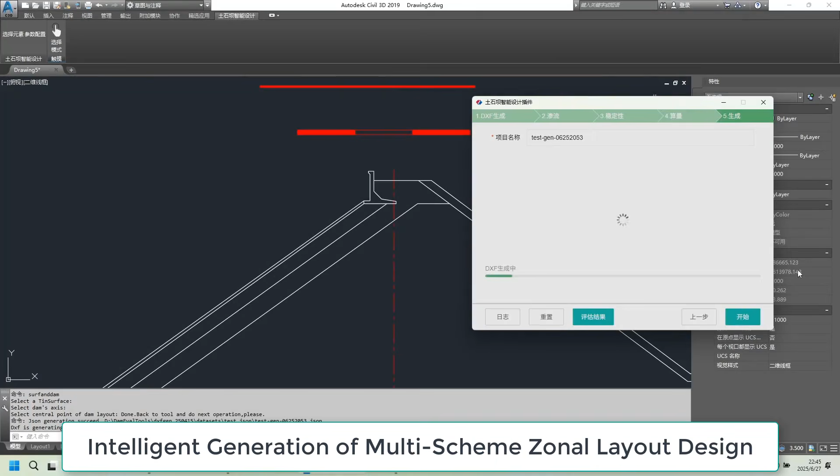Let me show the CAD-based workflow. The engineer starts a design project and enters the terrain, dam geometry, material information, and design parameters. The AI generates the zoning scheme, evaluates the mechanical indicators, and displays the two-dimensional and three-dimensional results. This work was jointly developed with Power China so that the research method could be connected to an actual engineering workflow.

We have also applied the generation, evaluation, optimization workflow to photovoltaic support structures. AI first learns from existing drawings and generates a support structure design resembling an engineer's solution. A finite element solver then evaluates and optimizes the design. In the cases shown, AI generation reduced the design time from approximately 60 minutes to about 1 minute while producing a comparable cost level.

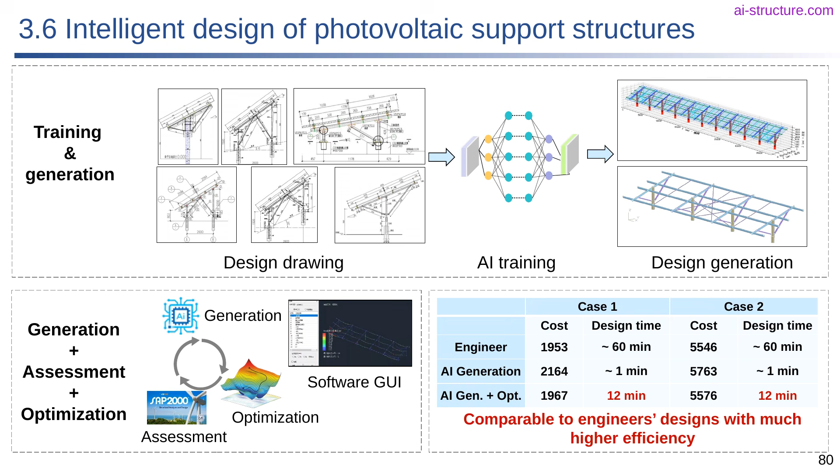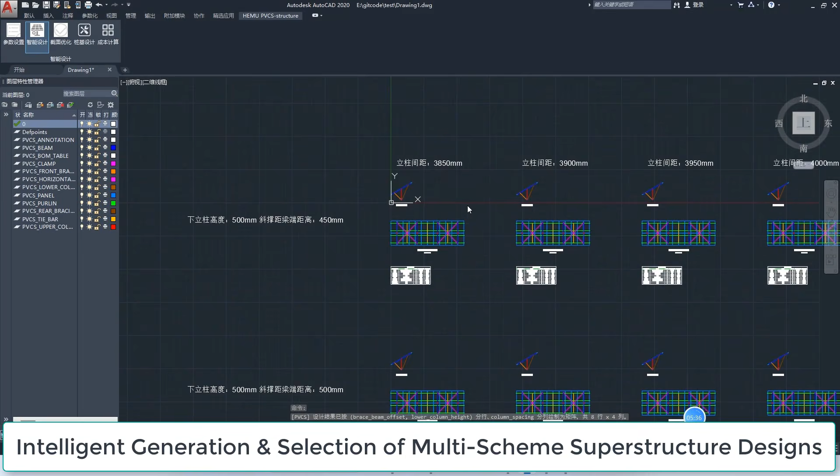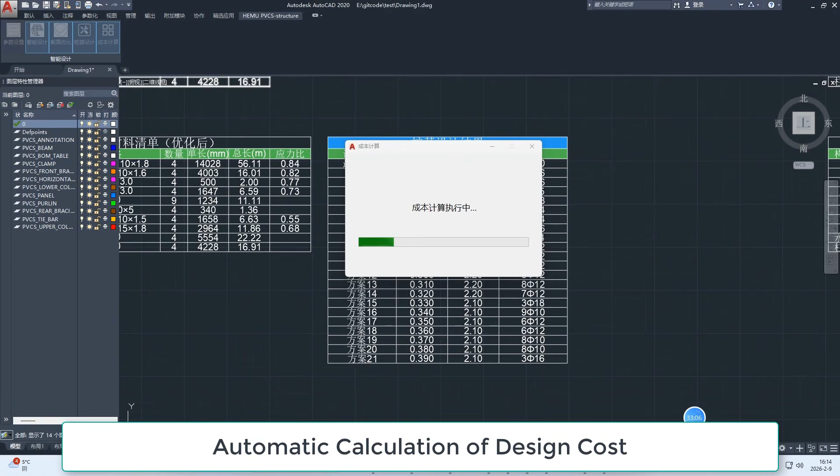The user begins by entering the project information. The system then generates the support structure, performs structural optimization, designs the pile foundations, and calculates the cost. Compared with manual design, the AI-assisted process increased efficiency by approximately 50 to 60 times in the cases shown. At the time of this seminar, this remained an active research and development direction.

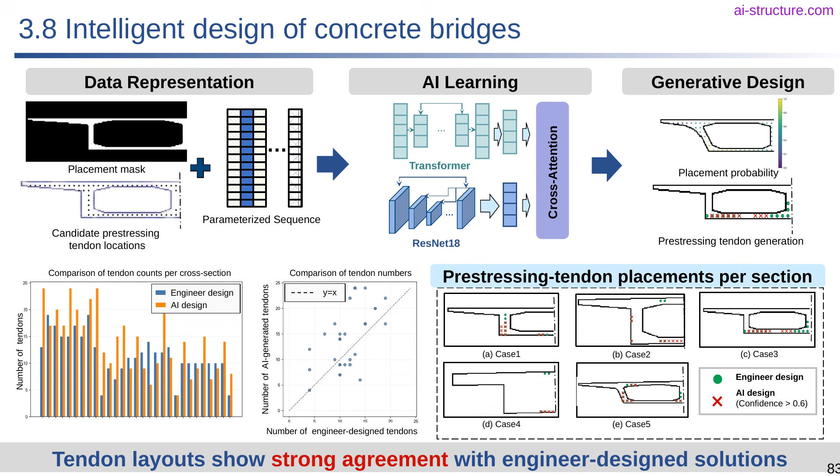When many design models and design stages become available, workflow organization itself becomes a research question. As a preliminary exploration, we developed an open-source framework called StructureClaw. Existing models often perform isolated generation. The purpose here is to connect generation, revision, analysis, and verification in a traceable loop.

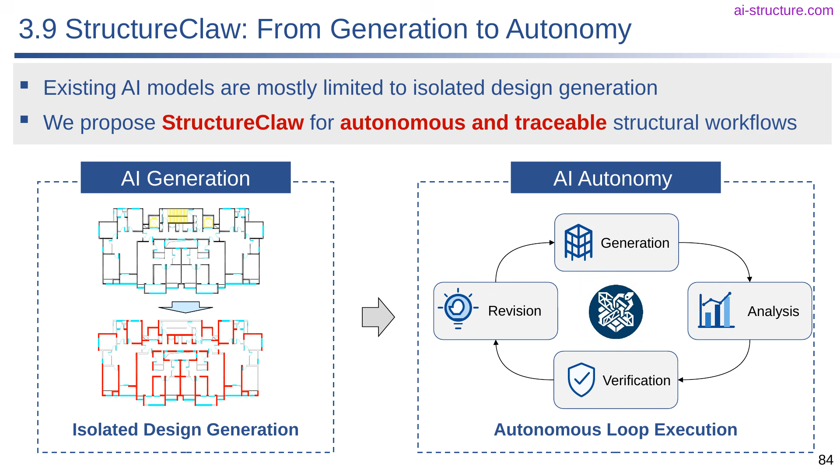The framework uses a reasoning and acting process to interpret a natural language design request, identify missing information, select an engineering skill or tool, execute a step, inspect the returned result, and continue to the next step. The aim is to connect otherwise isolated design tasks while retaining verified artifacts such as the structural model and analysis results. The StructureClaw platform is open source, so researchers and engineers can use it and contribute additional skills and tools.

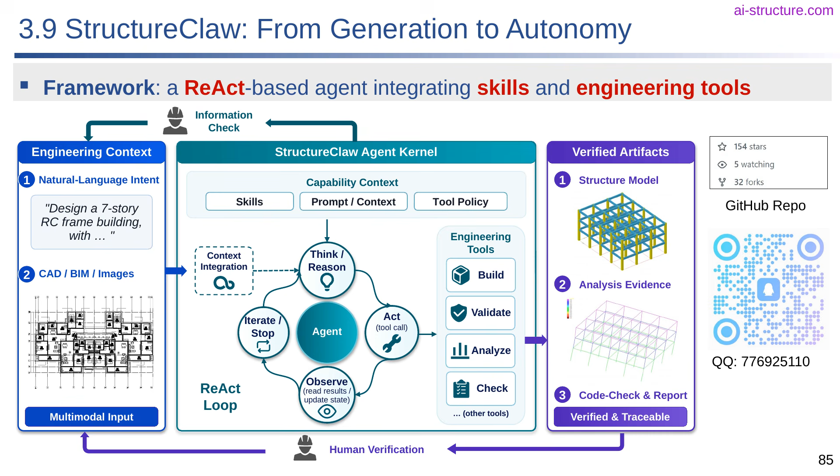That completes the application examples. Let me finish with several conclusions and thoughts for discussion.

This year marks approximately 30 years since I entered university and began my education as a civil engineer. During those 30 years, my colleagues and I learned structural mechanics, design codes, physical laws, professional knowledge, engineering experience, and many design drawings. Although today I have spoken extensively about AI, the foundation of the work is not AI alone. It is the combination of mechanics, physical laws, professional knowledge, design experience, and high-quality engineering data.

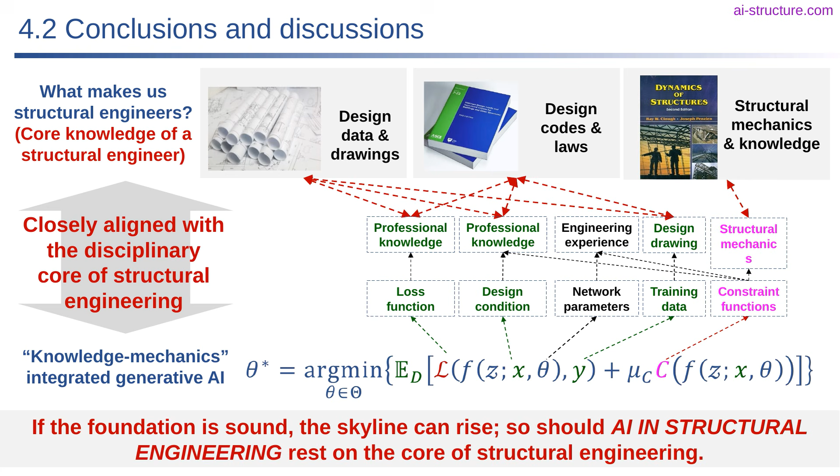AI design has several distinctive features. Once an AI system has learned a capability, it does not forget it in the same way a person may. The capability can be replicated at scale. A task can be completed in seconds, and the system can be available 24 hours a day, 7 days a week. This leads to a vision that has motivated our work, a master-level mentor for every young engineer and a tireless assistant for every engineer. Perhaps one day we can train an AI system that captures part of the capability of great structural engineers. It could help young engineers learn, support practicing engineers in difficult work, and reduce overtime.